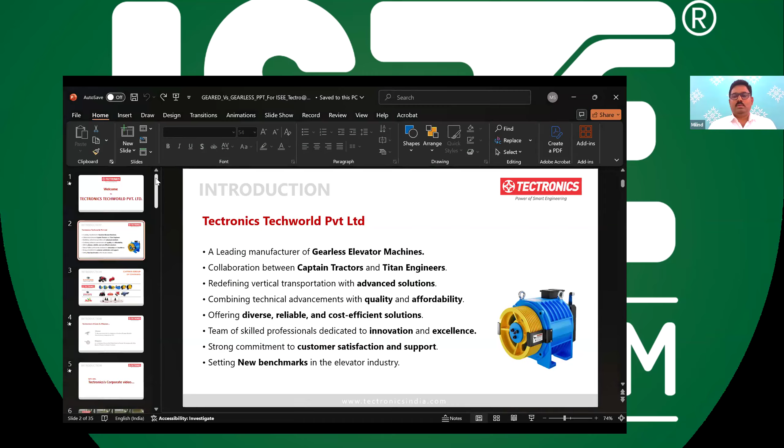Okay. So, good afternoon, everyone. I am Milind Shingate. I am a business development consultant in Tectronics. I have been in the industry for quite a long time, and now working with Tectronics. First of all, I will welcome you and give you a brief introduction of what Tectronics is. So Tectronics Engineers is now a private limited company, named Tectronics Techworld Private Limited, a leading manufacturing company of gearless machines for elevators.

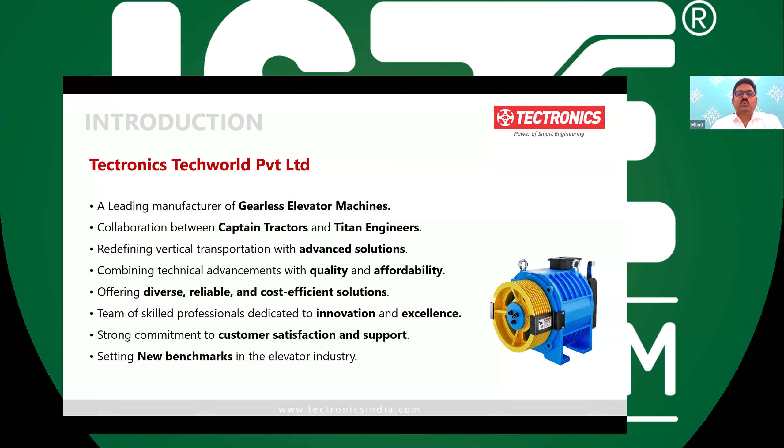This company belongs to Captain Tractor Group, and it is a collaboration between Captain Tractor and Titan Engineers, which was earlier manufacturing geared machines and components. Now we are doing some advanced solutions in the elevator industry. Combining the technical advancement in quality and affordability, we are offering diverse, reliable, and cost-effective solutions. We have skilled professionals dedicated to innovation and excellence, and a strong commitment to customer satisfaction and support, which most of you have already experienced. We are setting new benchmarks in the industry, and we will discuss those in the next slides.

Now we'll talk about the RTG24PN series for 6 passenger and 8 passenger machines. This machine has 408 kg and 544 kg capacity, 24 poles, 0.5 to 2.5 meter per second speed. Maximum static load is 2500 kg. We offer different traction sheave possibilities: 200 mm, 240 mm and 320 millimeter traction sheave diameter, and accordingly the power in kilowatts also changes. It is similar for 8 passenger capacity. Same specification, same possibilities are there. As far as traction sheave is concerned, the number of poles is the same, 24.

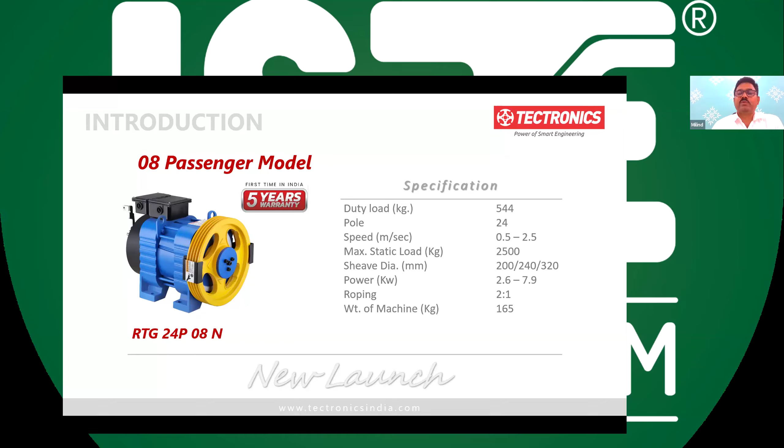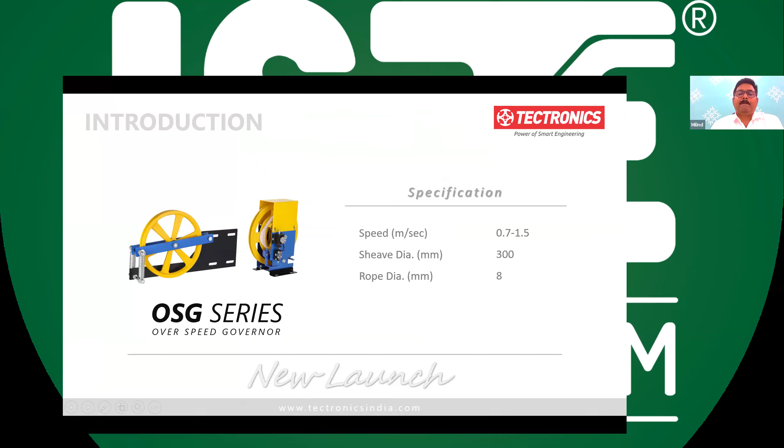Now, we will switch to our main subject, elevator machines, comparison between geared and gearless machines, and how the gearless is better. So whatever comparison we are going to share in next slides, it is presented based on our knowledge, our technical understanding, the data specification insight, and that is based on our knowledge, and we have shared.

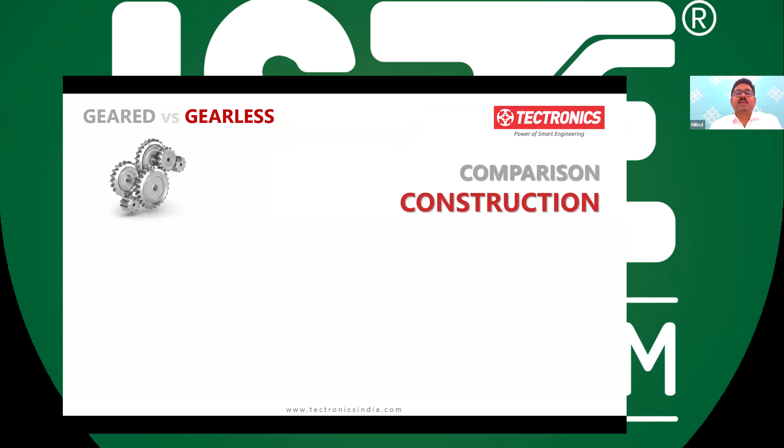So, construction. Now we will talk about the construction of the machine. So, in geared traction machine, the traction sheave is connected to the motor through reduction gearbox. There is a motor, then there is a gearbox, and then there is a traction sheave. So there is a gearbox in between. While in gearless traction machine, sheave is directly connected to the motor. There is no reduction gearbox present between traction sheave and motor.

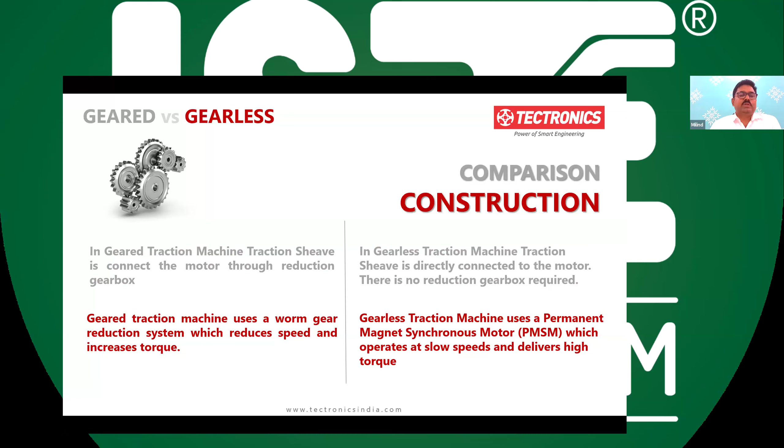Another thing is geared traction machine uses worm gear, sometimes helical gear, but mostly worm gear for the reduction system, which reduces the speed, because the geared machine is using induction motor, sometimes 4 poles, sometimes 6 poles, and motor RPM is very high, sometimes 960 RPM or 1440, 1450 RPM, which is reduced through reduction gearbox, and torque is increased. That's why you are able to move the elevator up and down.

In gearless traction machine, gearbox is not needed. So it is a permanent magnet synchronous motor. So we call it sometimes PMSM motor, which operates at very low RPM, very low speed, and delivers high torque.

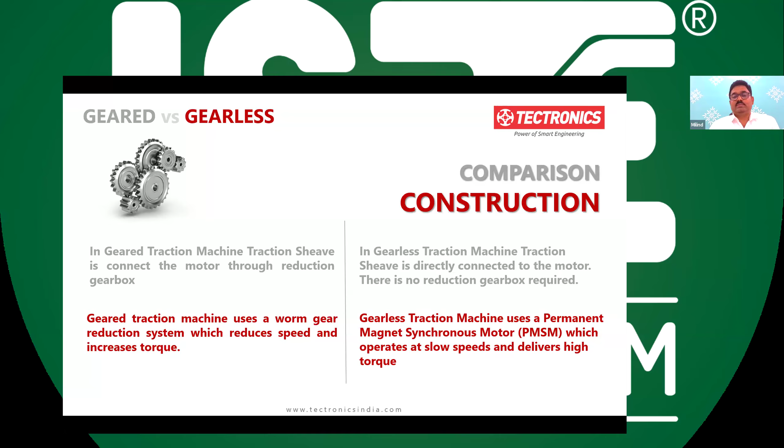So if we have to compare component by component. So first component is motor. Motor in geared traction machine, it is high speed AC or DC motor. In case of AC, it is an induction motor. In DC, it depends. Most of the time, they used to use compound motors, with a high speed. In gearless, it is a low speed PMSM, it means permanent magnet synchronous motor.

In gearbox, there is a worm or helical gear used. So gearbox itself is present, and in gearless machine it is not required. Traction sheave connected via gears. So as I explained earlier, there is a motor, there is a gearbox, and then traction sheave. While in gearless machines, traction sheave is directly mounted on the shaft.

Then comes installation application. For geared machine, there is always machine room required. All of you know it very well. But in gearless machine, MR or MRL, both the configurations are possible. You can install a gearless machine in machine room application as well as in MRL application.

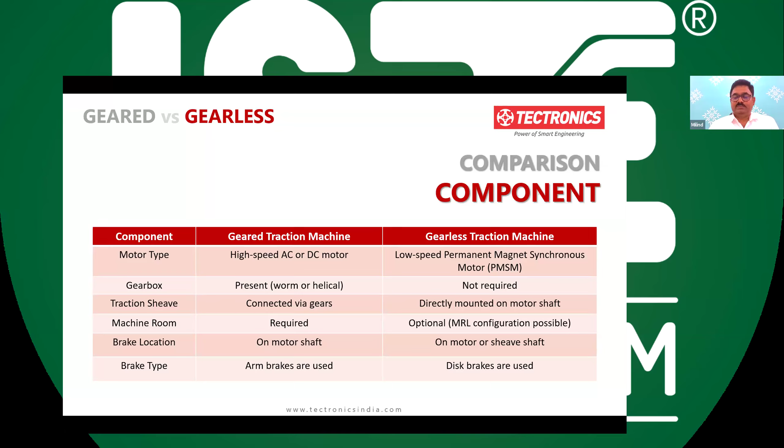Speed and power comparison. So if you have to compare geared and gearless machine on the speed and power parameters, speed range for geared traction machine starts from sometimes 0.5 meter per second or 0.63 meter per second till 2.5 meter per second. But there are very few companies in the world who manufacture geared machine up to 2.5 meter per second. Generally, up to 1 meter per second or 1.5 meter per second, geared machines are manufactured and used. While gearless traction machines are used up to 10 meter per second, or sometimes higher than 10 meter per second installations are taking place in some part of the world.

Power efficiency. Since there is a gearbox in the geared machine, efficiency is 60 to 70%, 35% losses take place due to worm gear. Worm gear has the highest losses in the power transmission. A gearless traction machine has highest efficiency, 85 to 95%, as it is a direct drive. There are no losses in the transmission.

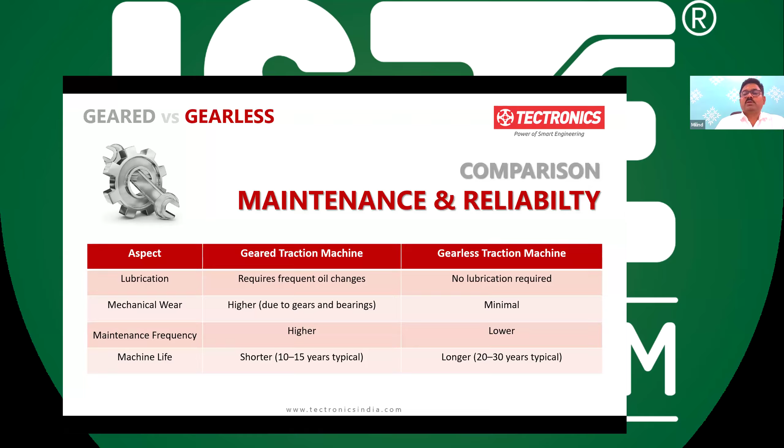We will compare geared and gearless machines based on noise and vibration parameters. In geared traction machines, the gearbox introduces mechanical noise, vibration and heat losses. These three are an integral part of any gearbox. Gearless machines operate almost silently with minimal vibration, providing a premium ride experience.

Now, suitability. Geared traction machines are suitable for low-rise commercial or residential buildings, where speed and comfort are not very important, maybe secondary, and basic requirements are fulfilled. Gearless traction machines are best for high-end commercial and high-tech residential high-rise applications. Nowadays, you might have seen, even from ground plus one or two, customers are asking for gearless machines.

Now we will compare geared and gearless on energy and environmental parameters. Efficiency. In geared machines, energy is lost as heat in the gearbox and braking system. Why I'm saying braking system is because there are three different types of geared traction machines: AC1, AC2 and V3F. Nowadays V3F is quite popular, but AC1, AC2 old installations still exist, wherein braking is done between brake drum and brake shoe. So energy is lost and heat is generated during braking, apart from burning the energy through the DBR. In gearless traction machines, since there is no brake drum or gearbox required, efficiency is improved, and it is sustainable for a longer period of time.

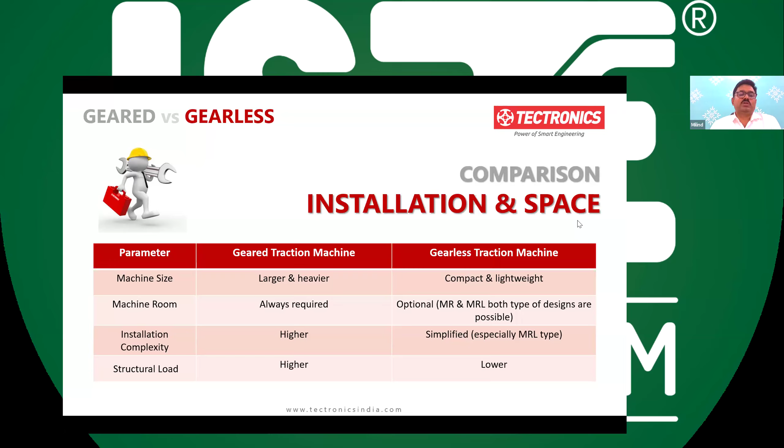Installation complexity: for geared traction machines, due to shifting to the machine room, complexity is a little higher, and in gearless machines, typically MRL application, it is simplified. Structural load in geared traction machines is higher due to the bulky, heavy machine, and in gearless traction machines it is lower due to the lightweight machine.

Now we will discuss cost comparison. Construction cost: basically, a geared traction machine needs a machine room. So for construction of the machine room, the overall installation cost for the developer or building owner is higher, and gearless fits into the shaft. So construction cost is slightly less.

Similarly, initial cost for a geared machine is slightly lower. Earlier it was much lower, but nowadays, thanks to Tectronics and some of our friends, we are offering a very competitive price even for gearless machines. Gearless machines are almost at the same price, or sometimes cheaper than geared machines of the same capacity and same speed. This is probably compensated by the car frame.

The car frame requires a little bit of additional pulleys on the car top and counterweight top in gearless machines, and in geared machines it is not required. But the difference is now compensated. Gearless machine prices are going down day by day.

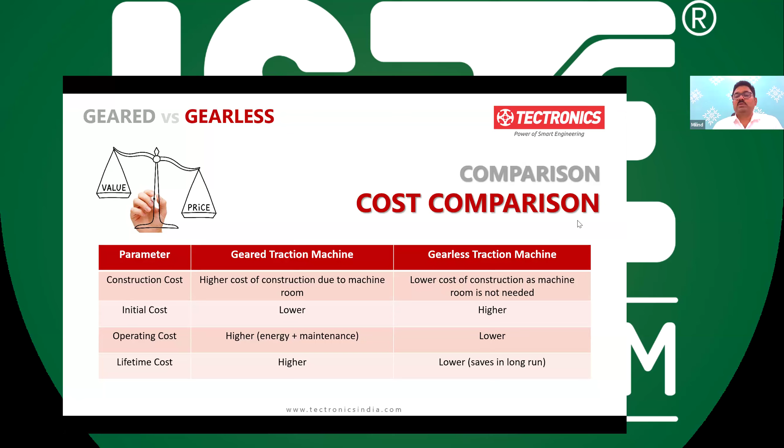So overall lifetime cost, if you calculate, the geared traction machine has higher cost, and the gearless traction machine saves a lot of money in the long run.

Application and suitability. If we discuss high rise and low rise, obviously geared machines we have been using for a few decades. They are suitable for low rise applications, while gearless machines are suitable for low rise applications as well. However, for mid rise and high rise applications, geared traction machines are not recommended. Gearless traction machines are suitable for all mid-rise and high-rise applications.

Luxury and commercial. No one will recommend luxury apartments or luxury commercial buildings to have geared traction machines and spoil the aesthetics of the building due to the machine room. Gearless is more suitable irrespective of the rise of the building.

Industrial and freight elevators. Again, gearless is much superior, a much more energy saving product. Industrial or freight lifts need bigger machines, bigger kilowatt, bigger current. So in that case, energy saving will be much more, and maintenance and breakdowns will be better in the case of gearless.

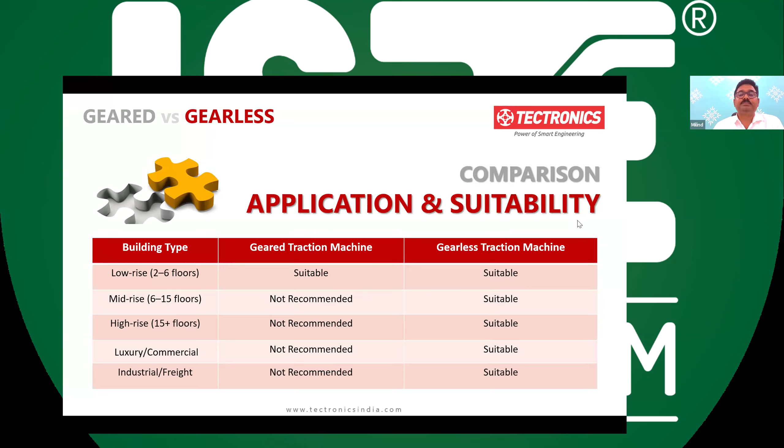Now, brand image. Geared machines are typical conventional installations we have been using and seeing for decades, but now everyone is going for modern, high tech elevators, latest technology. Gearless traction machines have better brand recognition for an elevator company. If you try to sell elevators with gearless machines, it obviously improves your brand image due to the use of advanced and modern technology.

Premium clients. Premium clients may not install old technology. They will prefer to go for the latest and modern technology. And gearless machines are the most suitable for that because premium clients prefer the new technology.

Market positioning. So market positioning of the geared traction machine installations: elevators with geared traction machines may face some challenges due to performance issues, noise, vibration, maintenance, aesthetics of the building, initial cost and all those things. While gearless installations stand out as the modern, high-tech performance solution.